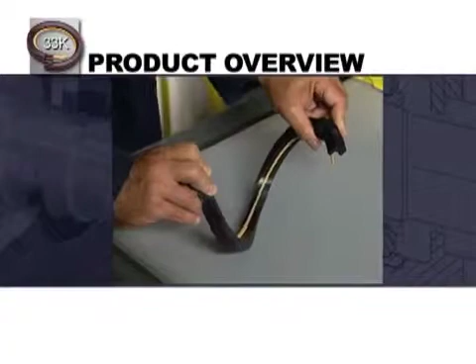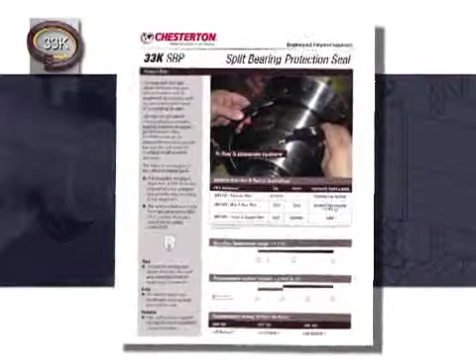The following program will present the innovative 33K split seal. This unique split design simplifies installation and improves performance for bearing and gearbox protection. The 33K has received the Product of the Year award from Plant Engineering magazine for its innovative design in the fluid handling category. The 33K can be used in many applications, including bearing protection for pumps, gearboxes, and rollers.

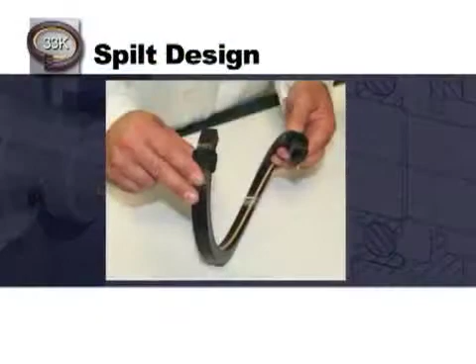The 33K split design eliminates the need and associated costs for equipment disassembly while improving the seal performance of conventional lip seals. Unlike conventional lip seal designs, the 33K split design dramatically reduces valuable installation time by eliminating the need for a complete equipment disassembly.

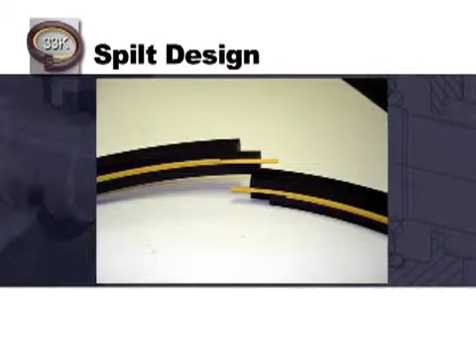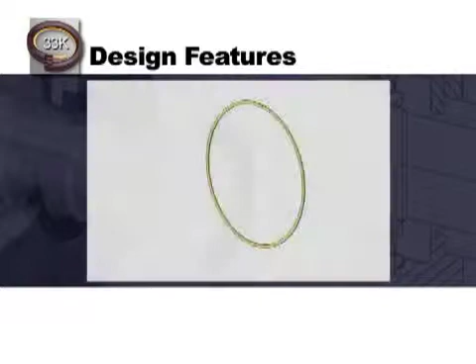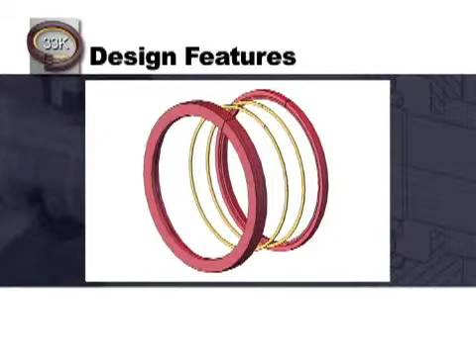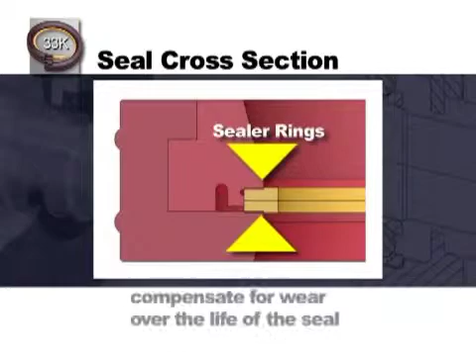Now we are going to review the design features of the 33K. The 33K is a unified assembly that consists of 4 individual split components: 2 sealer rings, 1 inner adapter, 1 outer adapter. All splits are staggered when assembled to ensure any leak path is eliminated. The sealer rings have 2 primary functions: to prevent leakage along the dynamic surface and to compensate for wear over the life of the seal.

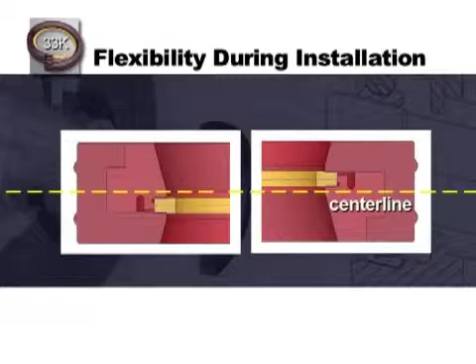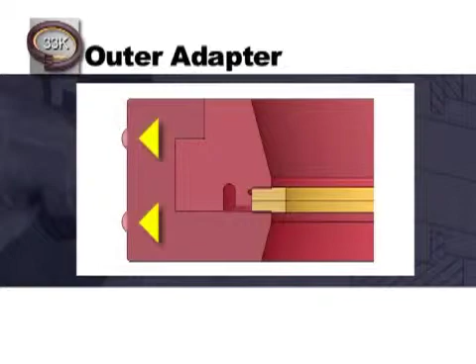By design, the sealing rings are located off-center. This unique feature allows for flexibility during installation to avoid contact with any damaged surface on the shaft. The inner adapter has a unique patent-pending spring design that radially energizes the sealing rings against the shaft. The outer adapter holds the stacked sealing rings against the inner adapter. This monolithic seal assembly acts as an energized unit, providing a positive seal against the shaft and a static seal against the equipment bore.

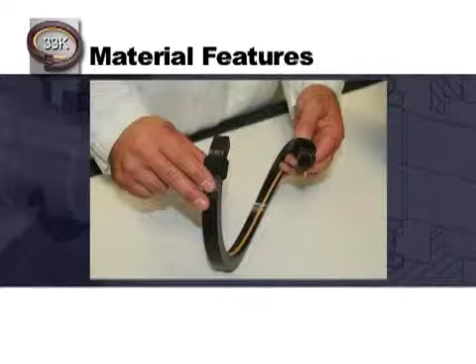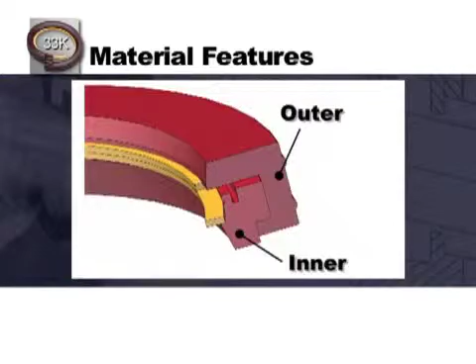Now that we have reviewed the seal design, let's review some of the key features with respect to the materials. The 33K is available in a variety of interchangeable exclusive materials, which allows the end user to choose the best material combination based on their application needs. The sealing rings are made from various high-performance, low-friction PTFE-based compounds that were specifically developed for sealing applications. The monolithic adapters are made from our advanced polymer materials, which provide excellent performance and superior durability. Be sure to reference the product data sheet to identify the ideal material combination for your application.

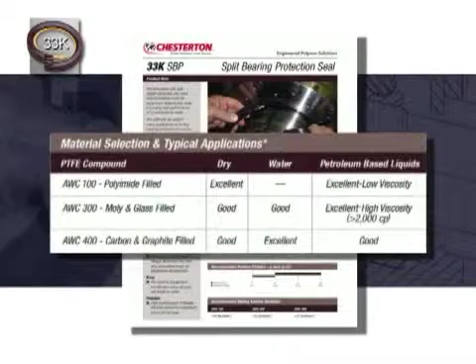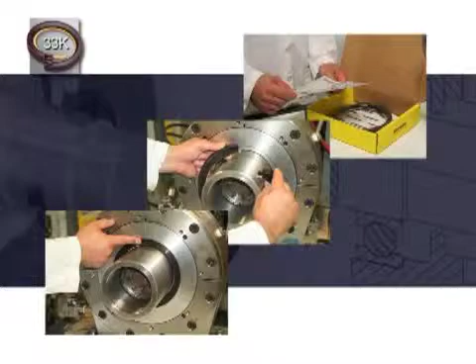The 33K split seal is an innovative, award-winning technology that offers a fast, easy, and reliable solution for bearing and gearbox protection. The unique split seal design eliminates the need for equipment disassembly, saving valuable time and money. There is no need for equipment modification, since all seals are made to order, minimizing costs and maximizing performance. The high-performance seal is proven to outperform conventional lip seal designs, increasing uptime and maximizing profits. The Chesterton 33K split seal, an innovative, award-winning technology that is easy to apply to your equipment.

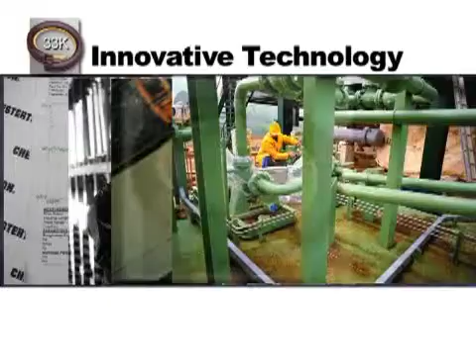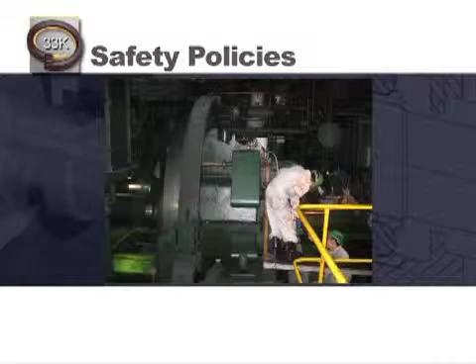In this section, you will observe how to install the Chesterton 33K split seal. Prior to installation, check with your Environmental Health and Safety Department for specific procedures and policies that apply. And always remember, all safety policies and procedures should be followed. To start the installation, ensure the equipment is in proper working condition according to the manufacturer guidelines. The Chesterton 33K split seal is delivered pre-assembled from the factory. It is accompanied by a hard copy of detailed installation instructions which provides a step-by-step explanation on how to properly install the product.

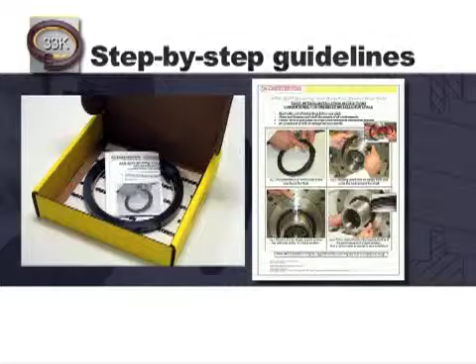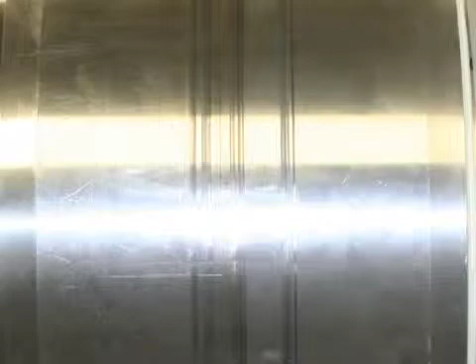Begin by familiarizing yourself with the seal. Next, evaluate the shaft for any damaged surfaces to determine the ideal seal orientation for your equipment. If damage is identified, be sure to locate the sealer rings away from any fretted or damaged area. Remember, by design, the sealer rings are located off-center. Following the guidelines provided, clean the seal cavity and shaft thoroughly of all contaminants. Now you are ready to install the seal into the equipment. Read the entire installation instructions before you begin.

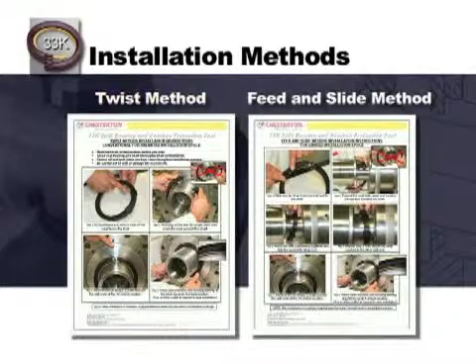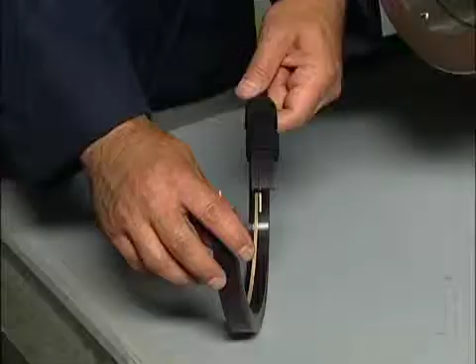There are two different methods demonstrated on the installation instructions provided: the twist method and the feed and slide method. The twist method is conventionally used when the shaft obstruction is not an issue and there is plenty of room to install the seal. The feed and slide method is most commonly used when the shaft obstruction does not allow the seal to be twisted around the shaft in the conventional manner. It is the responsibility of the installer to determine the best installation method for their equipment.

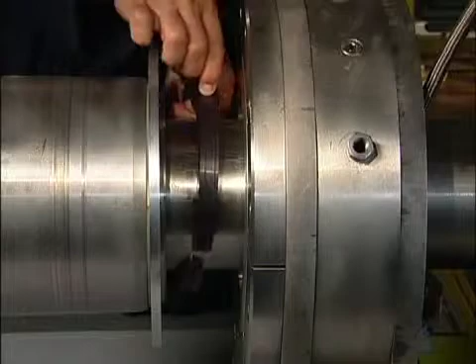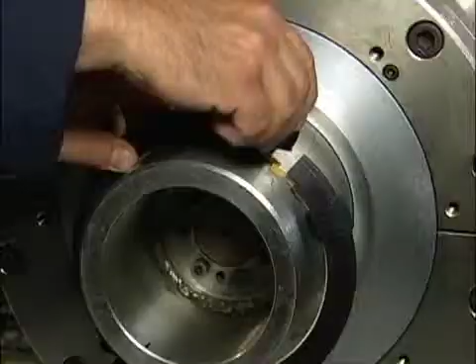Now we will demonstrate the installation using the twist method. Notice the seal is pre-assembled at the factory with two tie straps at both split ends. Holding the seal at the two tie straps, twist and wrap around the shaft. You can remove the tie straps at this time. Locate and join the split ends at the 12 o'clock position.

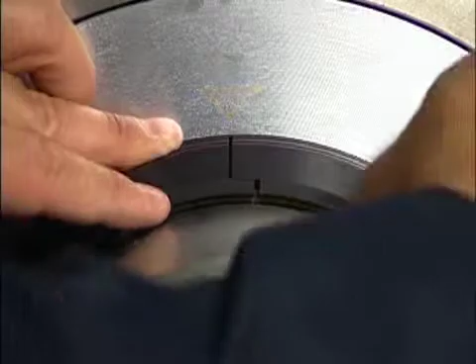Starting with the split joints at 12 o'clock, begin pressing the seal uniformly towards the 6 o'clock position. Continue pressing until the seal is secured into the equipment bore. Due to the designed interference, the assistance of a rubber mallet might ease the installation.

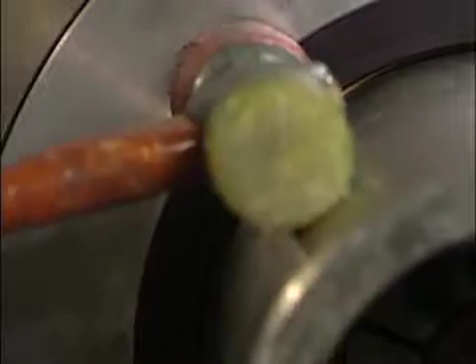Now we will demonstrate the installation using the feed and slide method. As mentioned before, the seal is pre-assembled at the factory with two tie straps that are located at each split end. This method requires you to slide one tie strap from one end around the seal next to the other. The first strap ties one end of the seal, while the second slides over and presses the seal components together during the installation.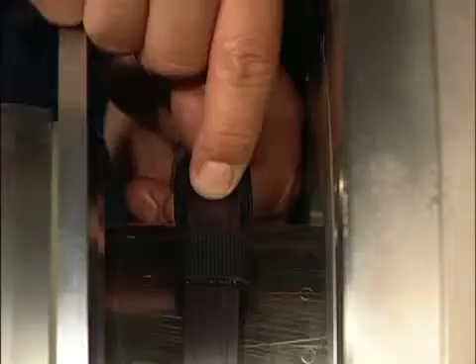Position the tied end of the seal towards the shaft while expanding the seal splits apart. Do not expand the seal more than the distance needed to wrap around the shaft. As you feed the tied end to wrap around the shaft, begin pressing the seal components together, then slide the second tie strap over the pressed portion to further secure the components.

Continue to press and slide until the second tie strap reaches the other split end and all the components are secured. You can remove the tie straps at this time. Now locate and join the split ends at the 12 o'clock position. Starting at the split joints at 12 o'clock, begin pressing the seal uniformly towards the 6 o'clock position. Continue this method until the seal is secured into the equipment bore. Due to the designed interference, the assistance of a rubber mallet might ease the installation.

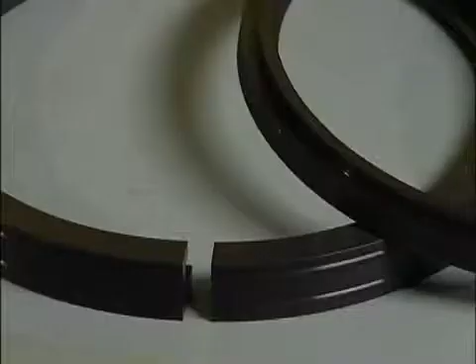The inner and outer adapters are made from our extremely durable polymer material and difficult to damage during installation. However, be careful not to nick or damage the sealer rings at any time since they are made from a softer material. As the seal is pressed into the bore, notice the splits start to close together as the seal is worked into the bore circumference.

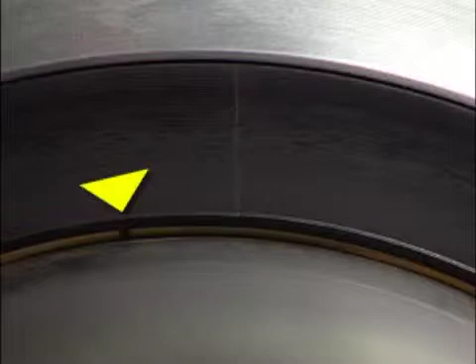As the seal is evenly seated into the bore, notice the gap between the adapters is barely noticeable. However, by design, once installed, a gap will be visible between the sealer rings. This gap prolongs the seal life due to wear. As the sealer rings wear, the gap between the sealer rings decreases, which indicates that scheduled maintenance of the product should be considered. The installation is now complete.

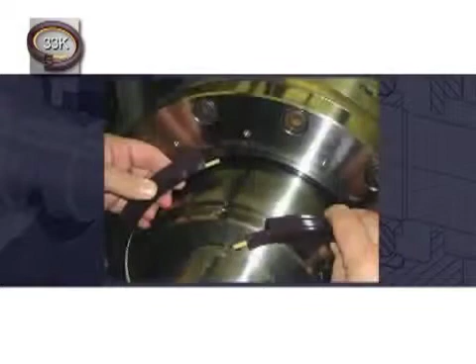Take all necessary safety precautions before starting the equipment. Following the simple steps described in this program and noted on the installation instructions will ensure a quick and reliable installation. This program demonstrated how the innovative 33K split seal simplifies installation and improves performance for bearing and gearbox protection.

Some of the documented case studies show the successful results of the 33K in operation. The 33K can be used in many applications, including bearing protection for pumps, gearboxes, and rollers. The 33K has been field-proven to increase MTBR in various applications and industries around the world.

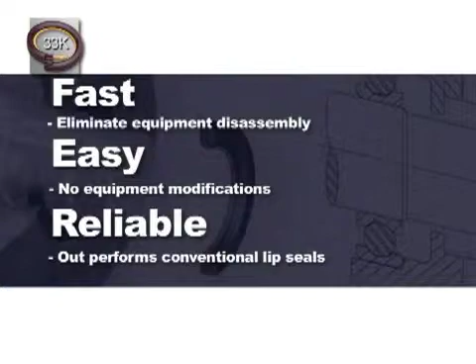The patent-pending split design eliminates the need and associated costs for equipment disassembly. There is no need for equipment modifications since all seals are made to order. The high-performance materials are proven to outperform conventional lip seals. The 33K split design, another industry-leading product by Chesterton.